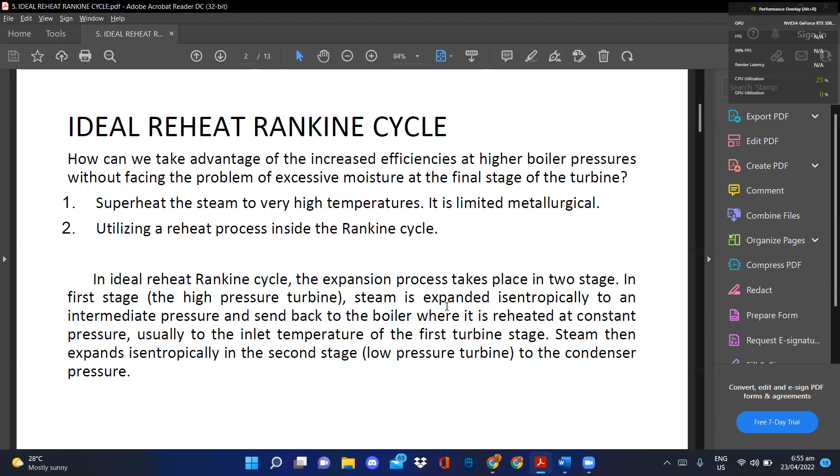So what does this mean? Let's convert this into a TS diagram. So for your TS diagram and your schematic diagram, our Rankine cycle goes from the boiler to your high pressure turbine, going to your condenser, going to your pump.

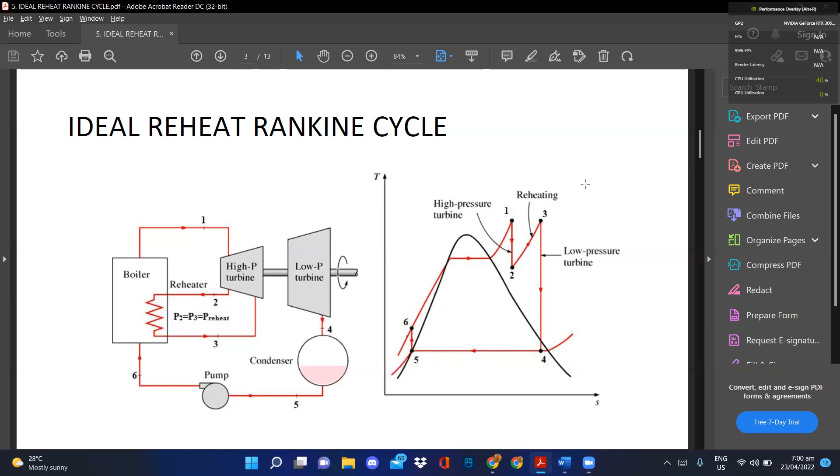Now, ideal reheat cycle with one stage of reheating is composed of the following processes. Process 1 to 2 is the partial isentropic expansion in the turbine. When you say isentropic, constant entropy.

Constant pressure resuperheating in the reheater, ibig sabihin constant pressure na to. Kung bakit constant pressure, ito yon - constant pressure, nire-reheat mo lamang. Okay? Constant pressure reheat, superheating in the reheater, 3 to 4, complete isentropic expansion in the turbine.

So dito natapos yung process ng turbine from exit na siya sa low pressure turbine. And process 4 to 5, we have constant pressure rejection of heat in the condenser. And process 5 to 6, the adiabatic pumping process.

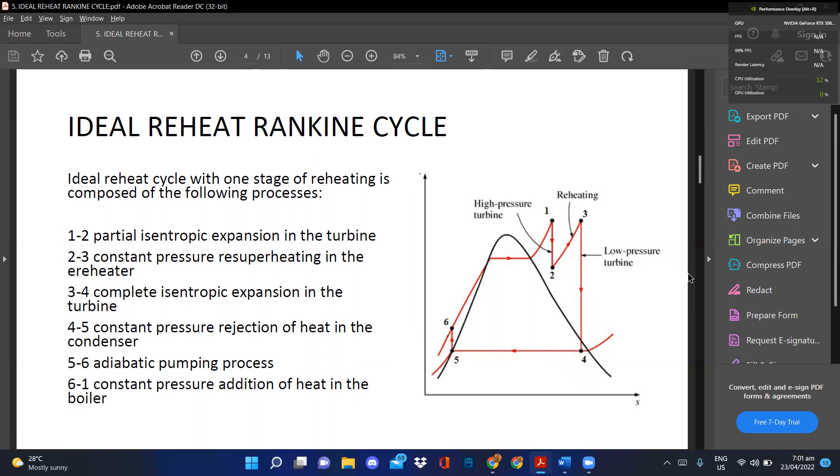Now, the single reheat in modern power plant improves the cycle efficiency by 4 to 5% by increasing the average temperature at which heat is transferred to the steam. The average temperature during the reheat process can be increased by increasing the number of expansion and reheat stages. As the number of stages increase, the expansion and reheat process approach an isothermal process at a maximum temperature.

The use of more than 2 reheat stages is not practical. The theoretical improvement in efficiency from the second reheat is about half of that which results from a single reheat, the reheat temperatures are very close or equal to the turbine inlet temperature. The optimum reheat pressure is about 1/4 of the maximum cycle pressure.

Now bakit ba tayo nagre-reheat? For we to be able to utilize the entire process in a Rankine cycle, we're going to introduce a reheater. Kasi kapag hindi tayo naglagay ng reheat, sayang naman yung pwede nating ma-utilize doon sa steam. Kasi kung mapapansin niyo for a Rankine cycle, you have only a low pressure steam, high pressure steam. After that high pressure steam, punta na agad siya sa condenser.

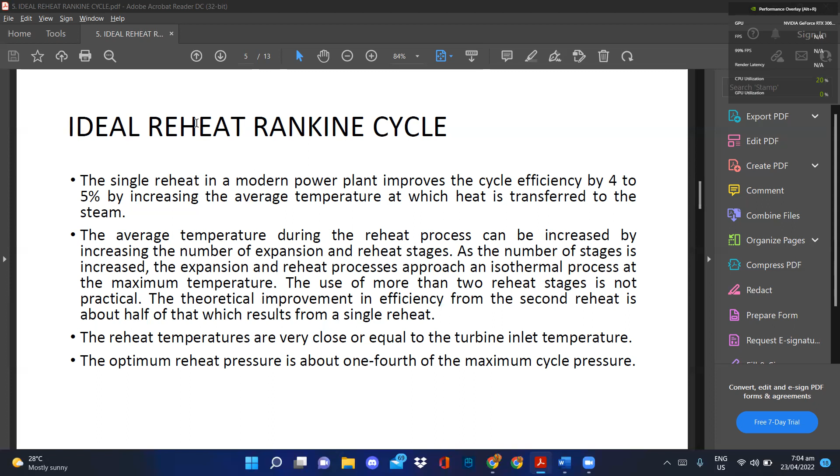So, kaya nagkaroon tayo ng reheater, para magkaroon ulit ng konting high pressure, para papunta naman sa low pressure, then papunta naman na sa condenser.

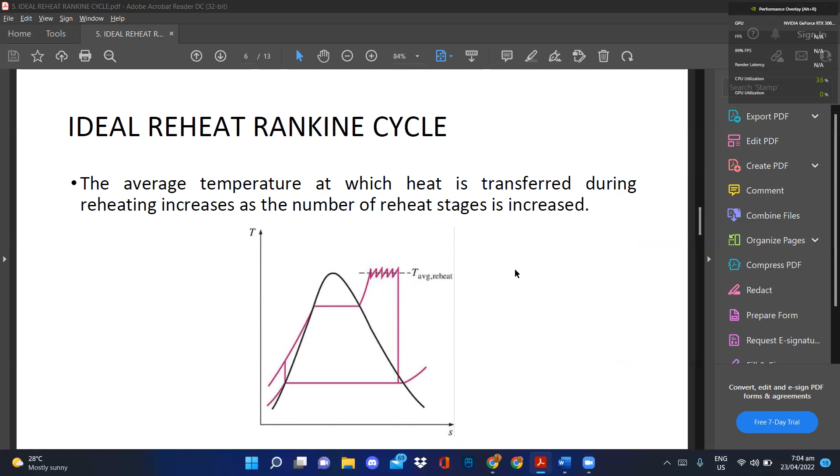Okay? Now, for the cycle analysis, let's derive formulas from every component of an ideal reheat cycle. For the heat added, you have your boiler down to your reheater. So you have your H6, you have your QB, which is your heat ng boiler, H1 minus H6. Then for a given number of stages of reheating, your Q added is equivalent to your QB plus the summation of Q reheat, RH.

Ano ba yung QR? Di ba pag QR, yung reheat natin, you have your boiler, lahat ng inlet, tapos lahat ng outlet. So H2 pumasok sa boiler, tapos H3, QRH plus H3. So kaya mangyayari QRH equals H3 minus H2. You applying the law of conservation of energy, lahat ng energy entering equals energy leaving. So ano nag-enter? H2. Anong lumabas? QRH plus H3. So you have to transpose. So your QRH would be H3 minus H2.

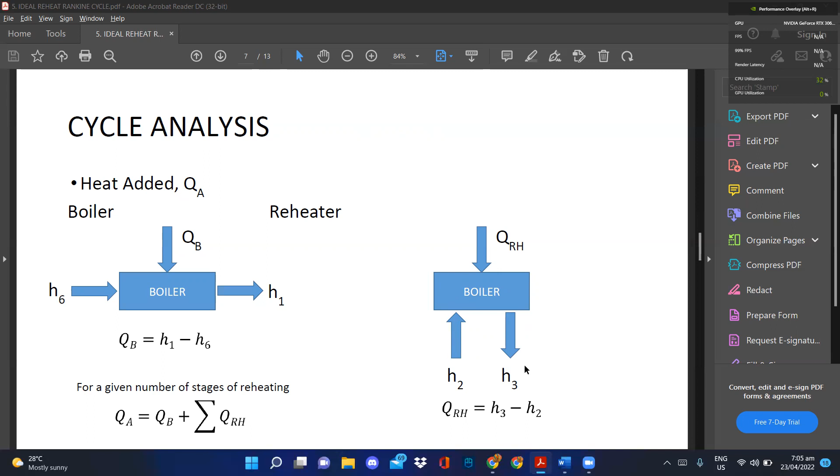Now for engine work, you have your turbine work. Turbine work equals H1 minus H2 plus H3 minus H4. So you have H1 plus H3 plus... H4. H1 plus H3 lamang equals H2 plus H4 plus WT.

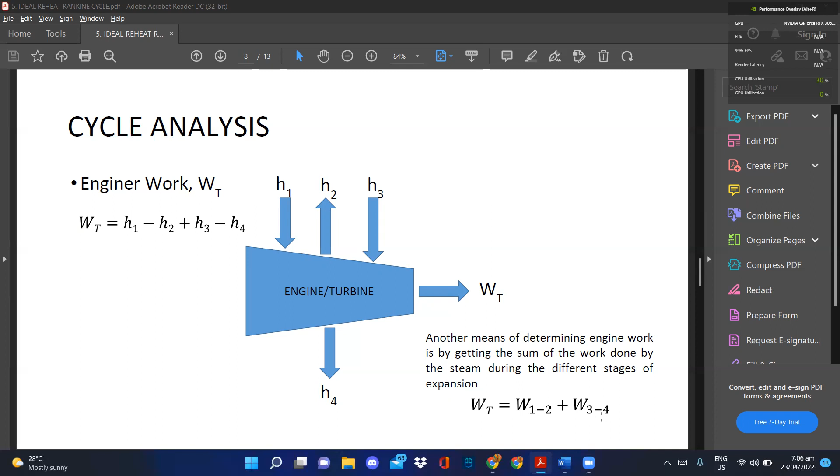So, simplifying it up, finding your work ng turbine of H1 minus H2 plus H3 minus H4. Another means of determining engine work is by getting the sum of the work done by the steam during different stages of expansion. Or kaya work ng 1 to 2 plus work ng 3 to 4 na process. Parehas lang din ang sagot yan.

Now, for the cycle analysis, for the heat rejected naman, heat rejected is sa condenser. So you have H5, we have H4 yung pumasok, lumabas sa H5 and your QR. Now, lahat na pumasok equals lahat ng lumabas. So H4 equals H5 plus QR. So therefore, your QR equals H4 minus H5.

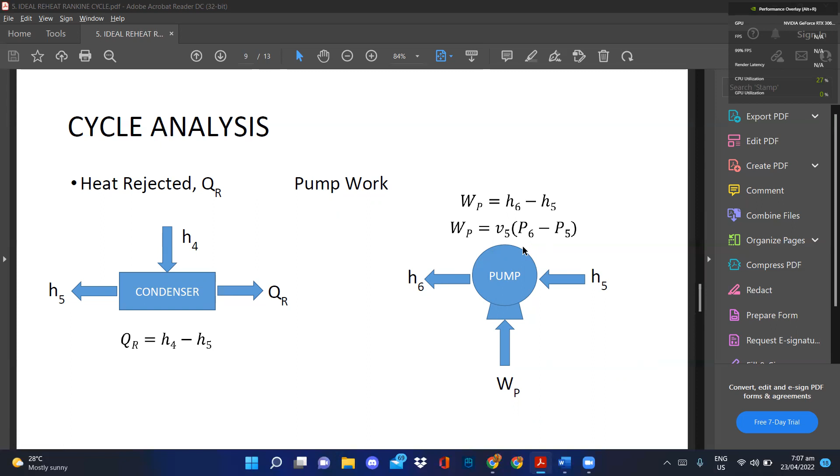Now, for the pump work, work ng pump equals H6 minus H5. Or simply, your specific volume ng 5, multiply by your pressure ng state point 6 minus pressure at state point 5. Now, for the performance parameter, net cycle work or work net would be your work na turbine minus your work ng pump, or equivalent to your QA minus QR.

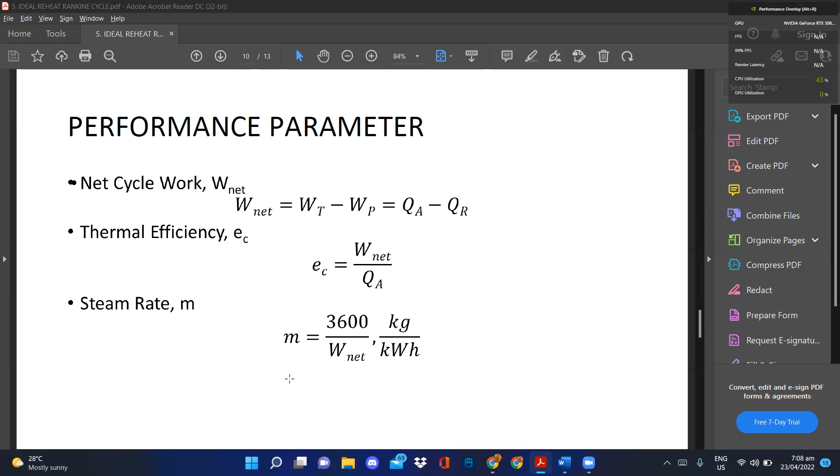For the thermal efficiency, ganun pa din, you have your output all over your input. So your how much work do you produce all over your input energy. So that is the efficiency of your cycle. For the steam rate, so we have 3600 all over your work net.

Now, for the ideal reheat engine naman tayo. So you have your work ng turbine, H1 minus H2 plus H3 minus H4 yung kanina. So yun yung steam rate ng engine work ng turbine, 3600 over WT. Energy chargeable against the engine: enthalpy of steam entering the engine minus enthalpy of saturated liquid at condensing temperature plus summation ng QRH. So therefore, you have H1 minus HF5 plus H3 minus H2.

For the thermal efficiency, you have your work ng turbine all over your energy chargeable against the engine. And your heat rate equals your steam rate ng engine work, all multiply by your energy chargeable against the engine.

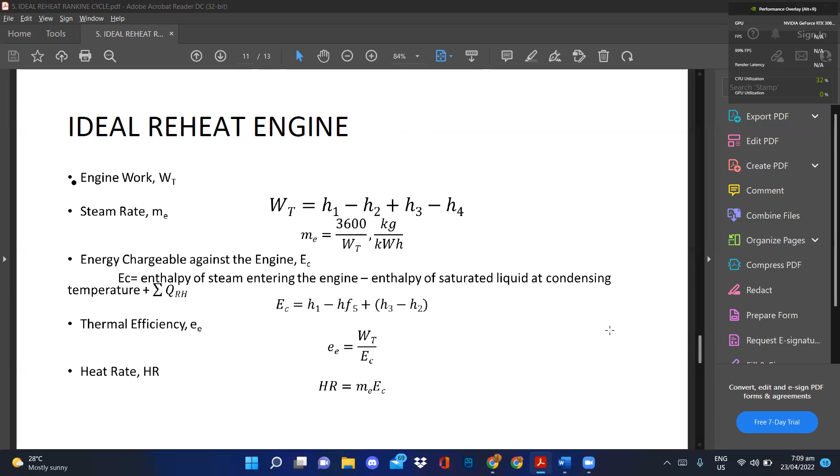Okay, let's try to solve this problem for you to be able to understand more the ideal reheat cycle. Now, an ideal reheat turbine with one stage of reheat receives steam at 8.0 megapascal, 480 degrees Celsius. Reheat pressure is 0.83 megapascal and exhaust pressure is 0.007 megapascal. The work is 1,559 kilojoule per kilogram and the thermal efficiency is 41.05%.

Find the temperature of steam leaving the reheater. So, ang ating hahanapin daw is the temperature leaving the reheater lamang. So, hanggang point 3 lamang tayo. Now, first things first, they're going to do is to draw the correct TS diagram.

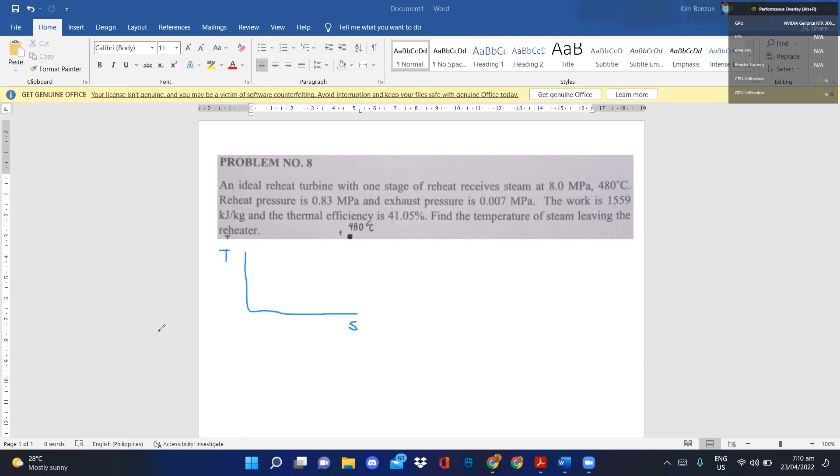Now, the reheat turbine with one stage of reheat, please take note, one stage only, receives steam at 8.0 megapascal. So therefore, you have your steam at 8 megapascal.

Now, at 480 degree Celsius. Now, reheat pressure is 0.83 megapascal.

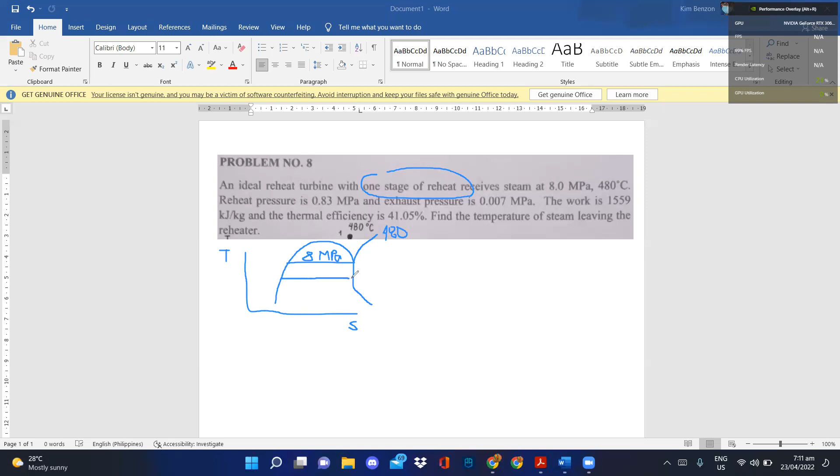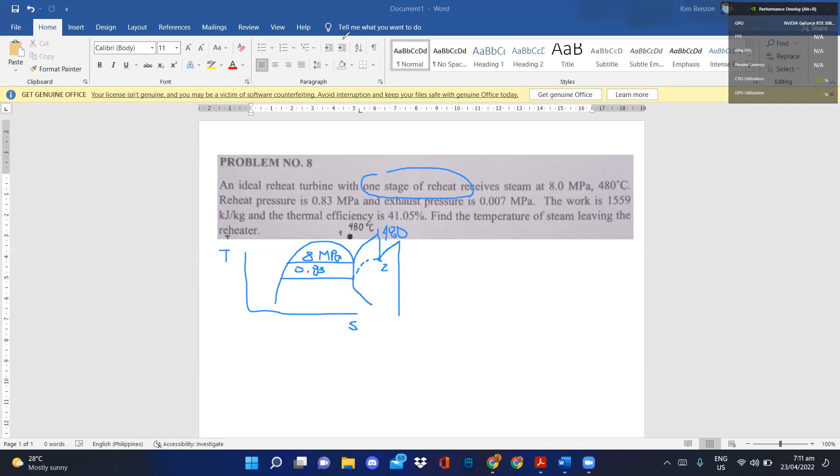So have your point 2 here, you have your point 1 here, then the exhaust pressure would be... okay, masyado palang maliit, ulitin natin. Dito ko na lang ilagay. Okay, so you have your 8 megapascal here.

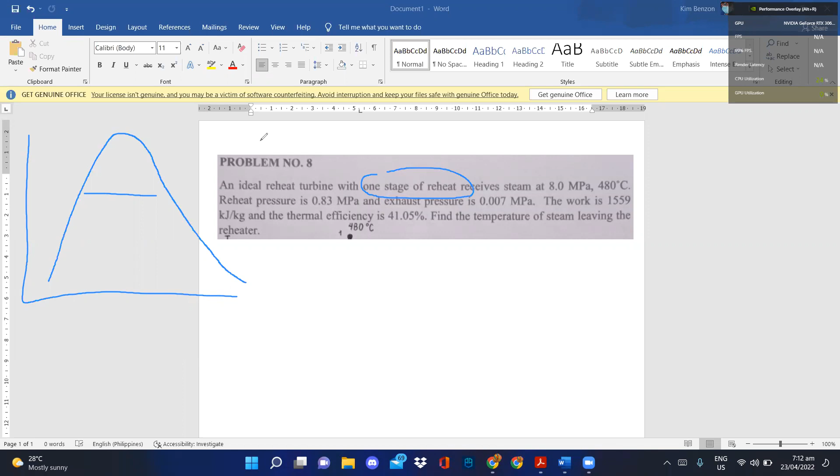Reheat at 480, so you have your 0.1 here. Then you have your 0.83.

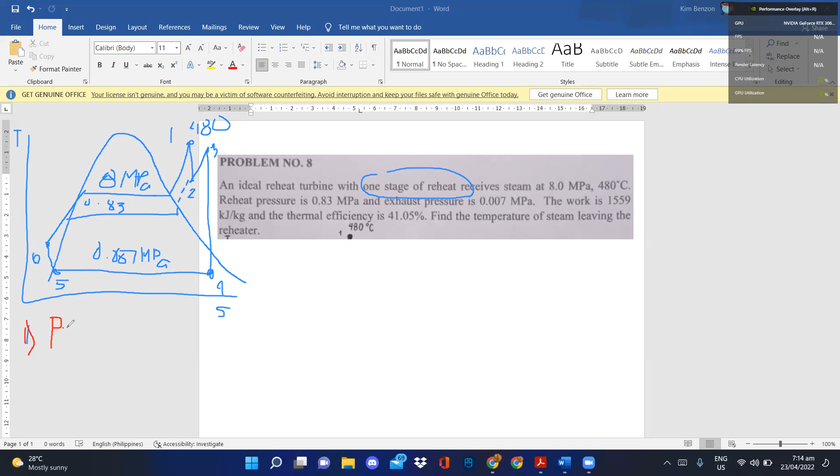At 0.1, P equals, ang pressure mo is 8 megapascal. Temperature mo is 480 degree Celsius. Now you check sa table 1 muna kung siya ba ay saturated temperature o saturated pressure. Kapag hindi, so you therefore conclude that T is greater than your Tsat.

Kapag greater than ng Tsat, therefore this is superheated vapor. So dun ka pupunta sa table 3. At table 3,

you get the H1. H1 is equivalent to 3348.4 kilojoule per kilogram, and your S1 is equivalent to 6.6586 kilojoule per kilogram at 8 megapascal and 480 degree Celsius.

Now, at 0.2 naman tayo. At 0.2, your pressure, ito na 0.2, your pressure at 0.83 megapascal.

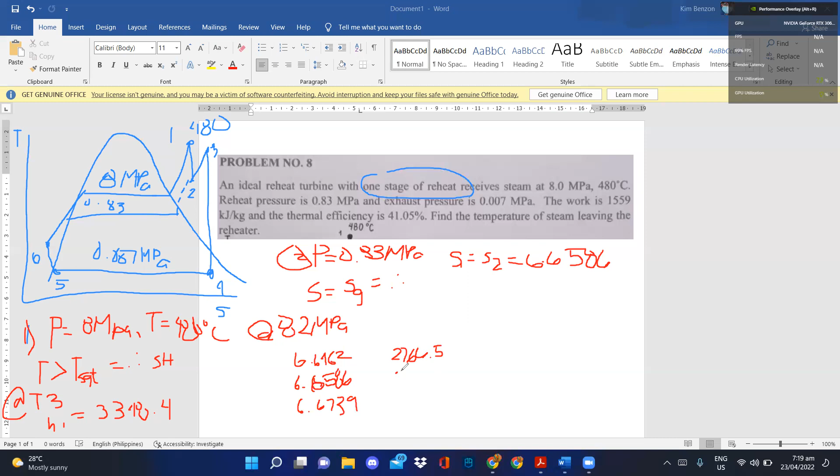You have 6.6586, yung hinahanap natin, yung ating given, you have 6.6739. Anong equivalent niyang H? 2766.5, 277, sorry.

Ito yung hinahanap natin na X. Dito yung 2778.9, so ito, hanapin mo to at 0.82. Ano yung pinagigit natin itong value? Pinagigit natin nitong value is 6.6162 and 6.6739.

Then you interpolate. Upon interpolation, you have X equals to 2772.050903. Next, for your at 0.84 naman na pressure, 0.84 megapascal.

So you have 6.63. You have 6.6586. You have 6.6602. And your H will be 2765 pala, sorry. Then you have your X here and 2777.4.

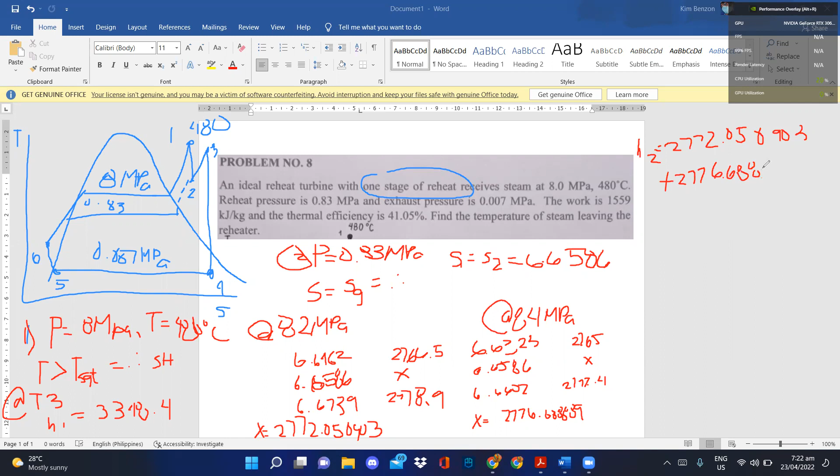So we're going to solve na yung H2. H2 is equal to 2772, 0.05, 0.903 plus 2776.68 divided by all over 2, which is yung H2 mo is equal to 2774.369896 kilojoule per kilogram.

Okay, now at pressure 5, at 0.5 naman muna tayo. Dilitin ko muna to.

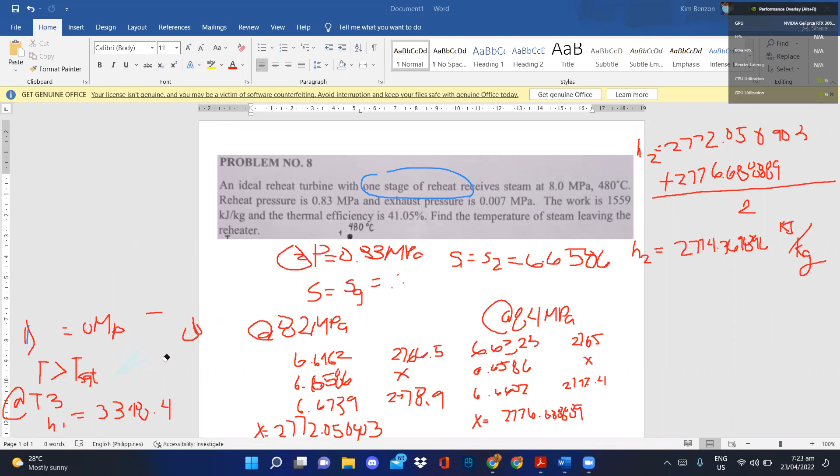Now, at point 5, we have pressure equals 0.007 megapascal. Your HF at 5 is 163.4. And your VF is equivalent to 0.0010074 cubic meter per kilogram. Now, we can solve for the work ng pump.

Work ng pump equals V5 times P6 minus P5. Your V5 is equivalent to 0.0010074. Multiply by your pressure. Ano ba yung pressure natin? 8,000 minus 7. You convert that, yung megapascal to kilopascal. Equals 8.0521482.

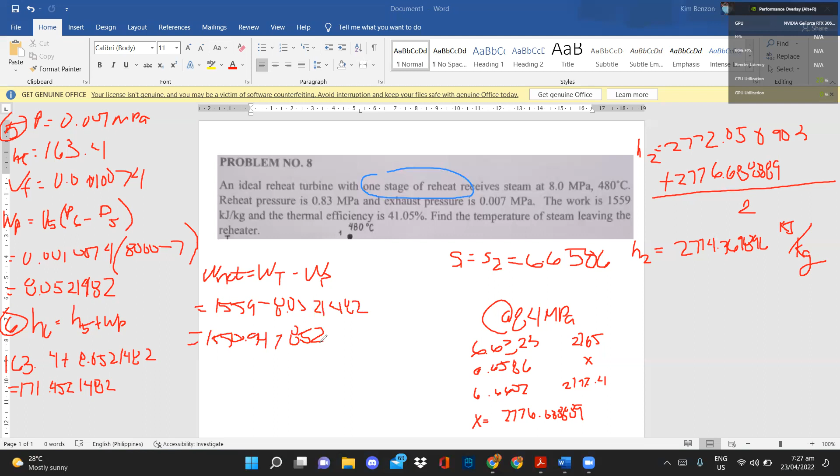You have your work net and we have the EC. So therefore makukuha natin yung meron tayong efficiency ng cycle. So we have your work net all over your efficiency ng cycle para makakuha ka ng QA. So your QA equals work net all over

efficiency. So your work net is equal to 1550.947852 divided by 0.4105. Ito yon, thermal efficiency. Equal to 3778.192087 kilojoule per kilogram. Now, from that QA, makakakuha ka ng H3 na.

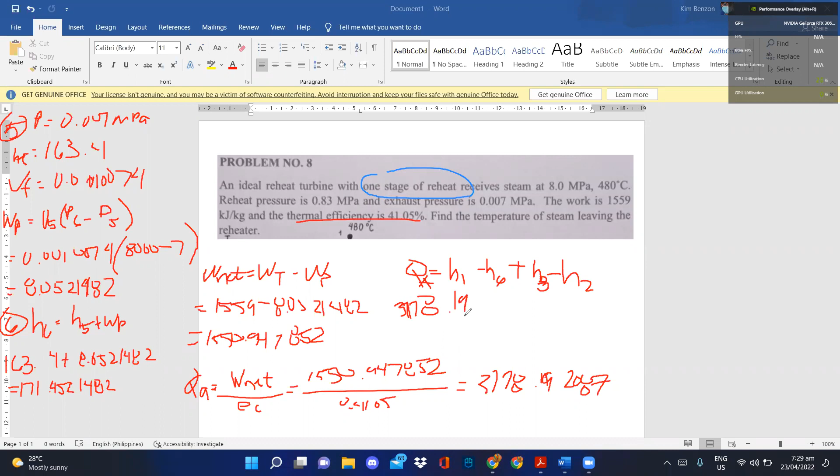QA, ano ba formula natin ng QA? Equals H1 minus H6 plus H3 minus H2. So, lagay natin. You have 3778.192087 equals

3348.4 minus 171.4521482 plus H3 na hinahanap minus H2. H2 natin is 2774.369896. So therefore, your H3 is equal to 3375.614131 kilojoule per kilogram.

So, meron na tayong H3. So, makukuha natin yung temperature na. Paano natin makuha yung temperature? So, pressure at point 3, 0.83 megapascal. Now, we locate ito munang H3. We decide kung siya ba ay superheated or saturated. So, at table 2, tingnan natin yung pressure natin 0.83. Then, we compare dong pressure na saturated, HG, is mas malaki ba o mas maliit?

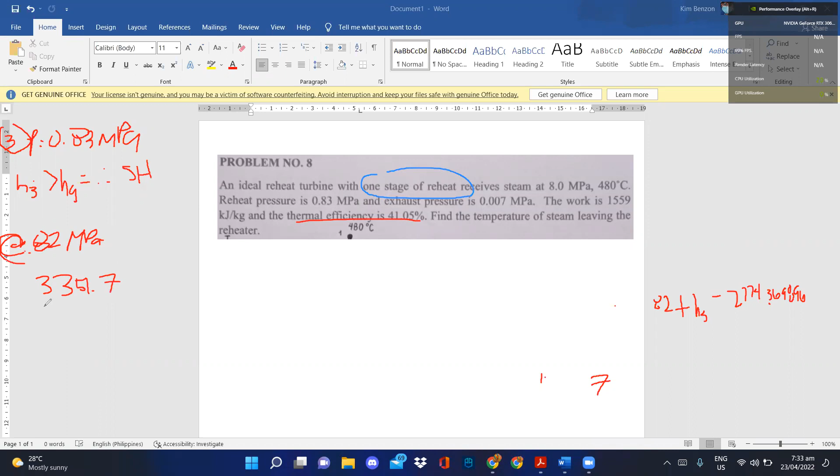At point 82 megapascal, we have 3351.7. Yung nakuha natin na enthalpy, 3375.614131. I have 3394.4. Sir, saan po makukuha ito? E di ikaw ay punta sa 0.82 na pressure at table 3. Then hanapin mo yung pinagigitnaan nitong nakuha nating H3. Yung gitna niya is 3351.7. Nasa pagitan siya ng 3351.7 and 3394.4.

And then you select yung temperature. Ano ang equivalent temperature noon? 440, and then ito ay 460. So upon interpolation, your temperature would be 451.2009982. Yun yung at 82.

Now, at pressure 84 naman tayo. At pressure 0.84 megapascal, the enthalpy is 3351.4. Yung enthalpy natin na nakuha, 3375.4161, sorry, 6141 pala. 6141.31, and then 3394.2.

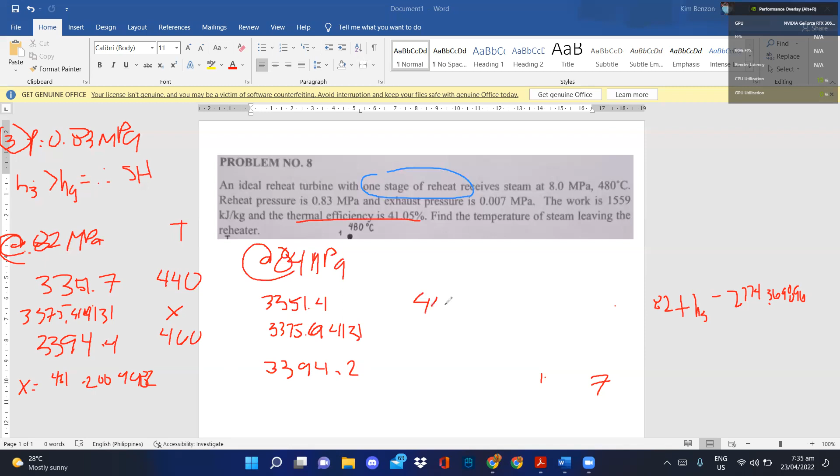Ang equivalent niya is 440 and 460. So from that, makukuha upon interpolation, your X is 451.3150145. So therefore, ano ba yung kaya di-divide natin siya sa 2 to get yung middle. So yun yung kanyang temperature mismo.

So have 451.20. So be very careful sa pagsosolve. Tingnan ninyo at napakaliit ng discrepancy ng dalawang number. Kapag kayo ay, kaya I won't tolerate the answers na naka-truncate na. So yun yung ating iiwasan.

2009982 divided by 2, which is equivalent to, temperature natin is 451.2580064 degree Celsius. And that is your T3. That is the temperature of steam leaving the reheater.